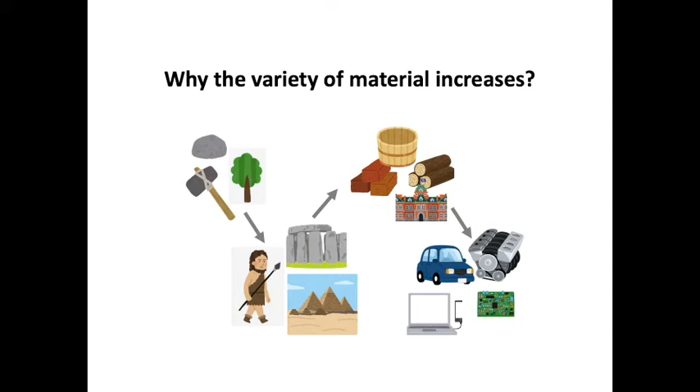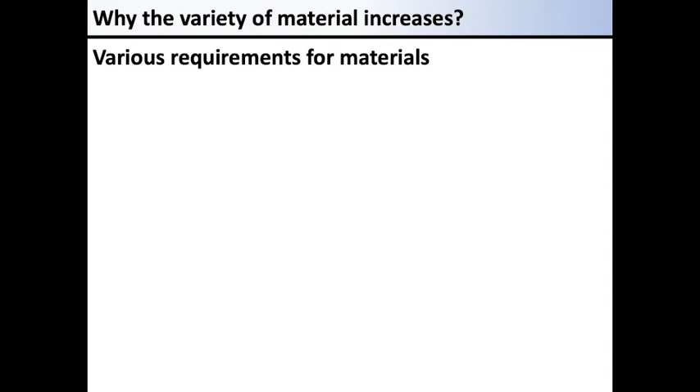Here, let me talk about why the variety of material increases. Human beings have made use of materials in their long history, not only for machines, but architecture and other tools. If everything could be made from a single material, there would be no need to argue about materials. Of course, this is not the case in reality.

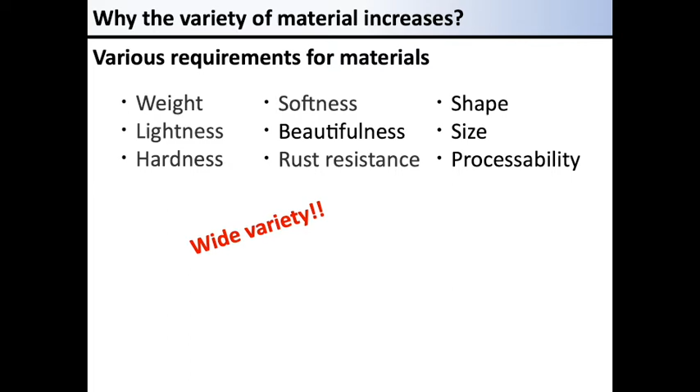Human beings have required a wide variety of properties in materials. For example, weight, lightness, hardness, softness, rust resistance, shape and size, ease of processing, and beautifulness. These requirements often include contradiction. For example, strong materials are needed to make a robust product, but in order to process it, the material needs to be soft. Human beings have always been searching for new technologies related to materials.

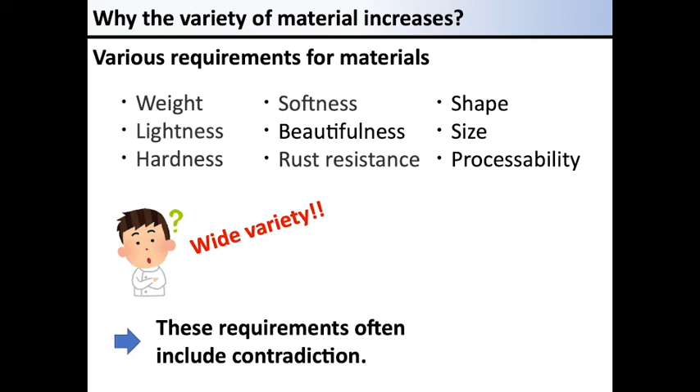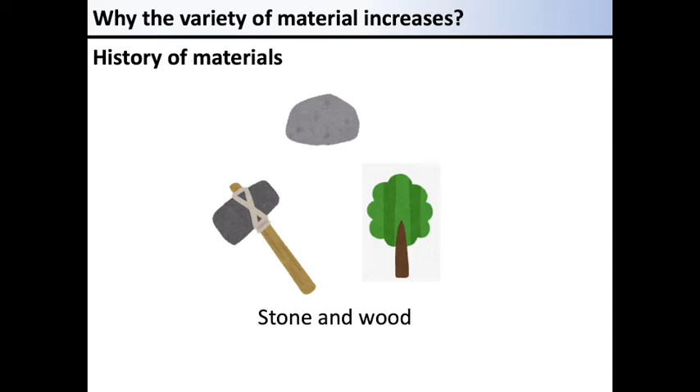This can be easily understood by simply looking back at the history of materials. In the past, the main materials for humans were stone and wood. You know that we used these materials to make simple tools. Then, they began to make buildings made of stone and weapons carved out of stone and wood.

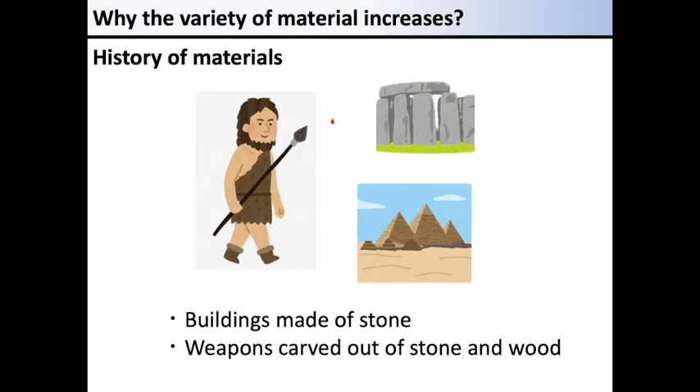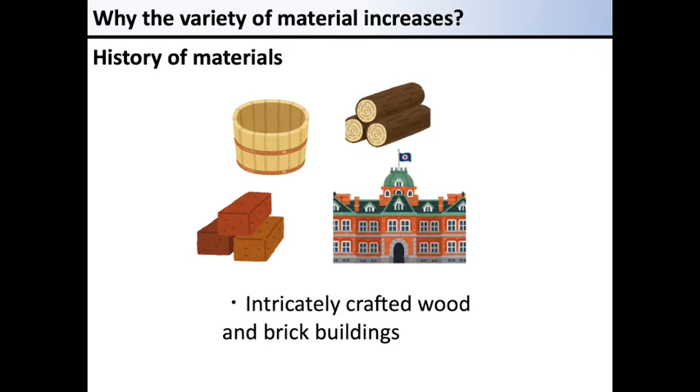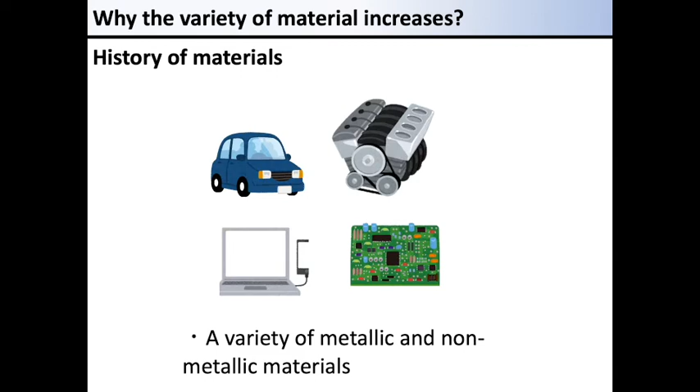Intricately crafted wood and brick buildings have also appeared. You may notice that designers in those days were required less knowledge of materials. That is much simpler than the current knowledge. Now, a variety of metallic and non-metallic materials, which are also used in machines, have emerged. In particular, metal materials are growing the variety of materials.

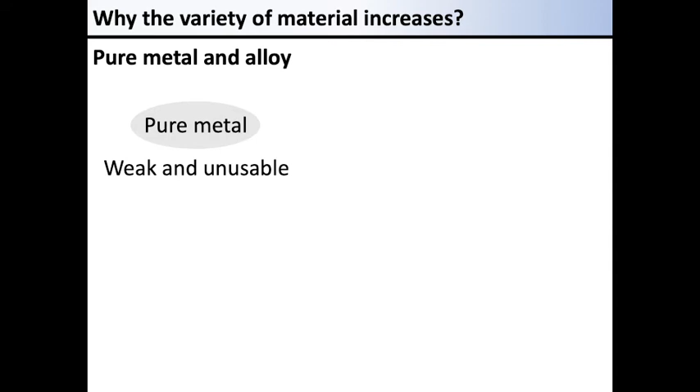Pure metals are generally weak and unusable. The metal materials we see in our daily life are alloys, pure metals melted with other metals. The metal materials that we should be familiar with in machine design practice are, of course, alloys.

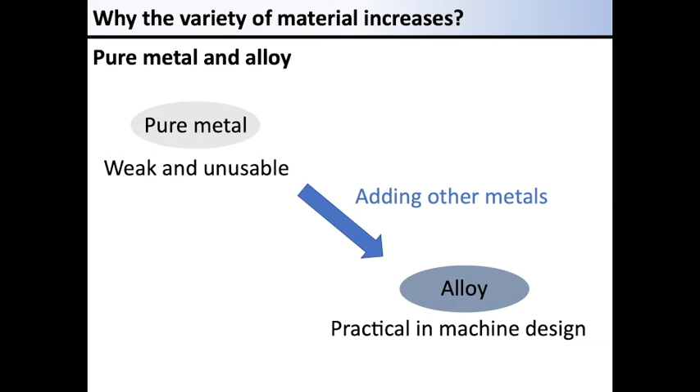For example, we use a metal called iron in a variety of applications. Here, you should notice that the material we call just iron is an alloy made by adding carbon, chromium, or nickel to pure iron to make it stronger. There are an infinite number of varieties of metals to be dissolved into a pure metal and ratios.

Metallurgy may be a research field that aims to create new materials that are useful for human beings from the infinite varieties. I am sure that researchers in this field are working day and night on the materials of their respective fields. This means that the variation of materials is fated to increase unlimitedly. It is important to catch up with the ever-increasing information on cutting-edge materials.

However, in many cases, the primary goal of machine design is not to find or apply new materials, but to achieve a design that realizes the optimal balance of QCD as introduced before. So, detailed knowledge and theory of the most advanced materials is often not essential for machine design.